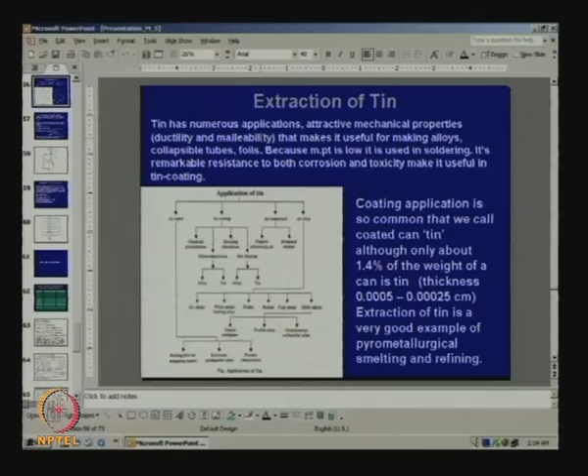Why is tin an attractive metal? If I say it is attractive because of various applications, that is not the right thing to say. Actually, the various applications come because it has many attractive mechanical and chemical properties. Because we have these attractive properties, we have found applications.

The attractive properties comprise mechanical properties. It is malleable, it is ductile, which means a piece of tin can be made into a thin strip, it can be formed into many shapes. It is also very useful in making different kinds of alloys which find wide applications, and you find tin or tin alloys in many household consumer items like collapsible tubes, foils, etc.

One big advantage of tin is its melting point is very low, only 232 degrees, and if it is low, it can find applications where we need some low melting alloys, like in solders for joining wires. So it is used in solders.

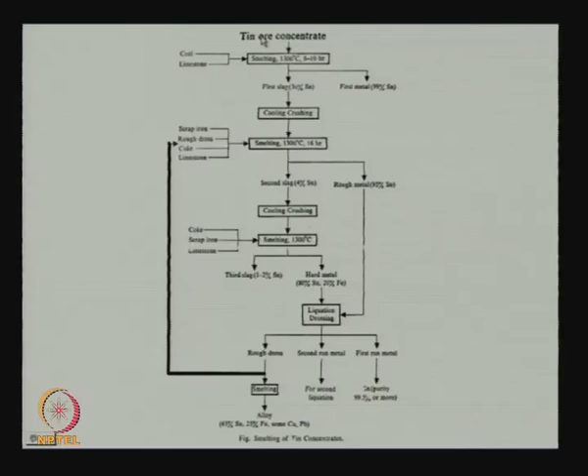Please note that SnO2 cassiterite is a fairly heavy oxide. Silica, gangue, etc. have a density of about 2, while SnO2 has a density more than 7. So we can employ gravity separation techniques, which exploit differences in density, particle size and shape. It is possible to produce a fairly rich tin ore concentrate with very high percentages of SnO2, not pure SnO2, there will be other gangue materials also.

Then we smelt, say at 1300 degrees for 8 to 10 hours. We add coal and limestone to make a slag, because the limestone combines with gangue which contains SiO2, producing a fluid slag. In that fluid slag, 30% SnO2 will dissolve. If you want, we can reduce it. If you make conditions more reducing, add more carbon, allow more time, tin will come out, but iron will also come out. We do not want that. Initially, we allow an incomplete smelting precisely because we want the first metal to be as pure as possible, and we might get as much as 99% tin in that step with only 1% impurities.

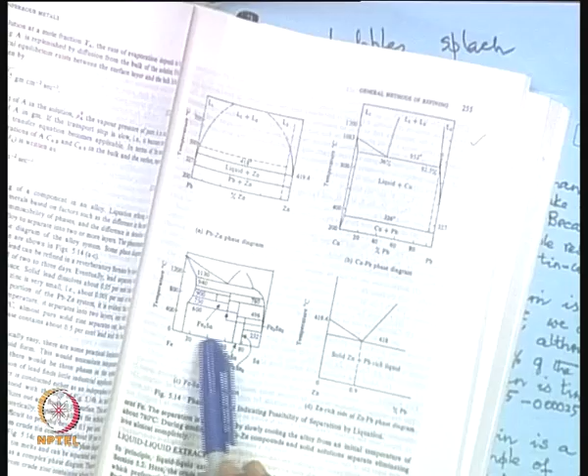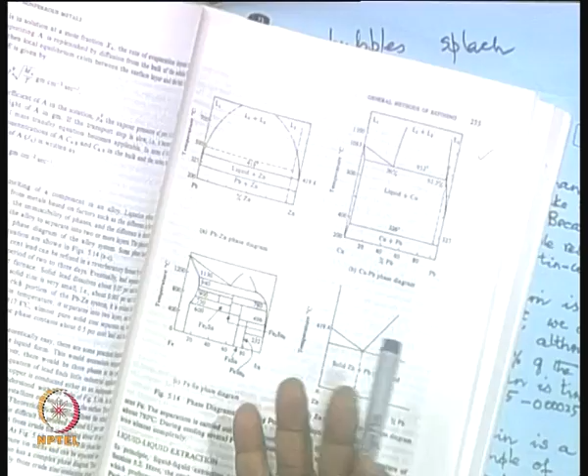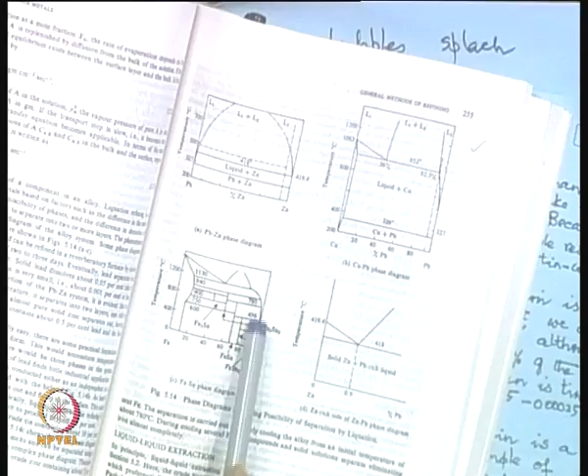The process of liquation makes use of the phase diagram. I hope you can see this phase diagram here. If not, it is in my book on extraction of non-ferrous metals, in the chapter on tin. This is the phase diagram for tin, with iron on this side and pure tin on this side. You see how complicated this phase diagram is, all kinds of phases forming. There is also around 75% tin, FeSn, an intermetallic compound, and also FeSn2, another intermetallic compound.

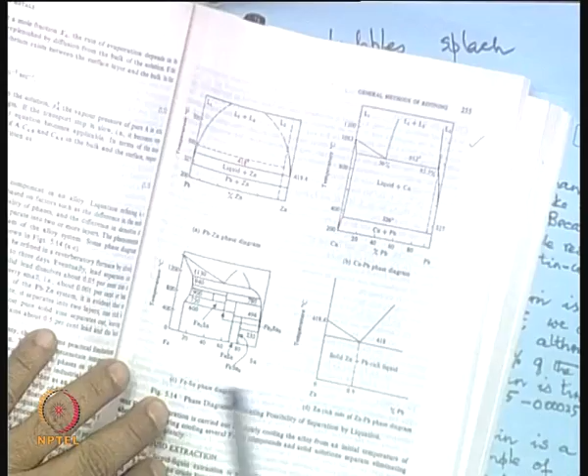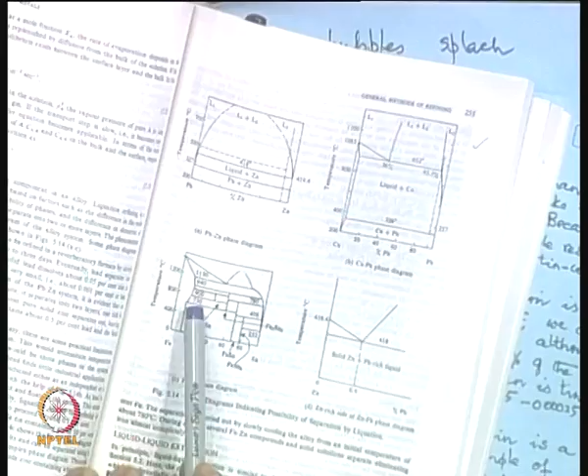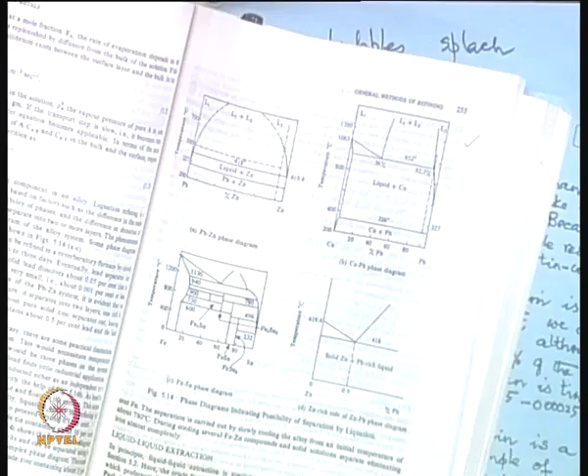The point to note is that if we have an alloy of iron and tin, and hold it around 600 degrees or so, it will separate into two phases. One phase will be almost pure tin, the other iron with some amount of tin. This is what is done by liquation: you simply take that alloy containing iron and tin to a temperature of about 600 degrees, and it will form two layers. Tin will float up because it is lighter than the iron-tin alloy. That iron-tin alloy has only a small amount of tin, but what floats up is almost pure tin, which can be taken out. So these are the principles of liquation, and that is what is done in liquation drossing: constantly you get something floating up and you remove it.

Now, this will give us rough dross, second run metal, first run metal - various stages. This will go for another liquation. The rough dross that has tin, iron, etc., will go back recirculated for total tin recovery.

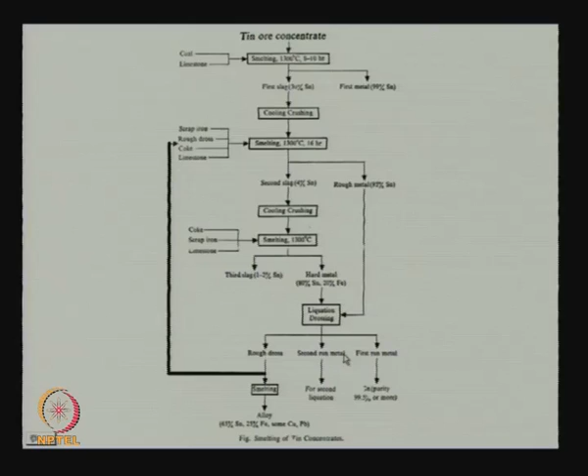The first run metal, the first layer that comes out, will be very pure tin, 99.5% tin. But as you take out pure tin, you are changing the composition of what you are purifying. In the second step, it will not be so pure. In the third step, it will not be very pure - it will only have 65% tin, with 25% iron, copper, and lead. This will have to be recirculated back.

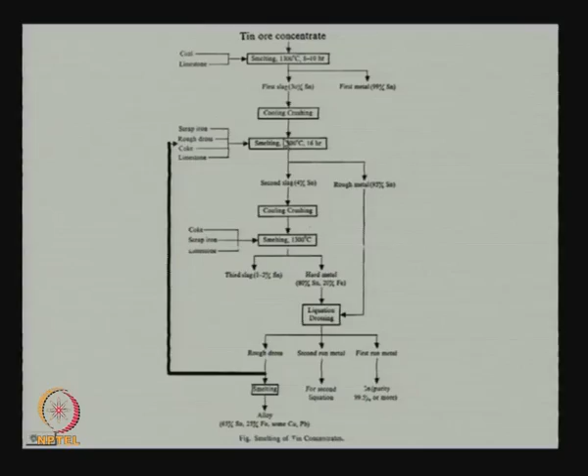So, this is a classic metallurgy of tin, where things are very, very interconnected. But now, equally interesting is how you purify that impure tin that you have produced. I will spend a little bit of time on that.

Now, you should understand: if impure tin is cooled to just above the melting point, then many intermediate intermetallic compounds that exist as impurities will separate out and float as solid crystals. Tin melts only at 232 degrees, so we take the impure tin to slightly above the melting point.

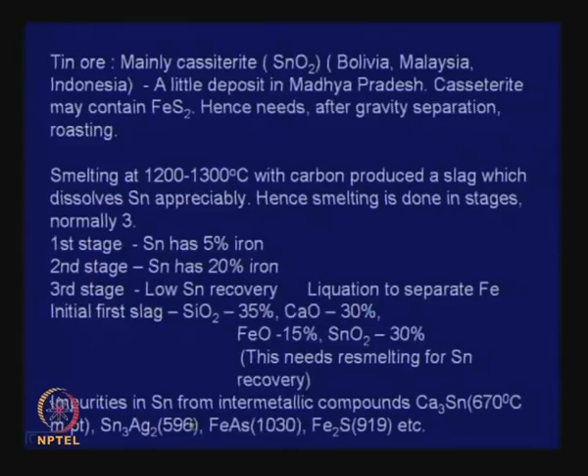You now have a molten mass. Inside, the impurities we have as intermetallic compounds have higher melting points - remember, I have shown them. At the bottom of this slide you have Ca3Sn at 670 degrees, an intermetallic compound with silver at 596, FeAs at 1030, Fe2Sn at 919. So these impurities are very high melting.

So, when there is a bulk of molten impure tin, the impurities inside are not melting, so they will float up. There are some age-old techniques to help these crystals float up. It is done by adding charcoal, because charcoal is a very light material - the particles will float, and in that process they carry those impurity intermetallic compounds to the surface.

These techniques have been evolved thousands of years ago, more than 2000 years ago. Somebody figured out how to do this. So, you go just above the melting point, intermetallic compounds separate out and float as crystals.

Now, pulverized coal facilitates liquefaction. Light rising coal particles carry the crystals with them. Coal also ensures maintaining a reducing condition, so that the impure metal you are trying to purify will not get oxidized.

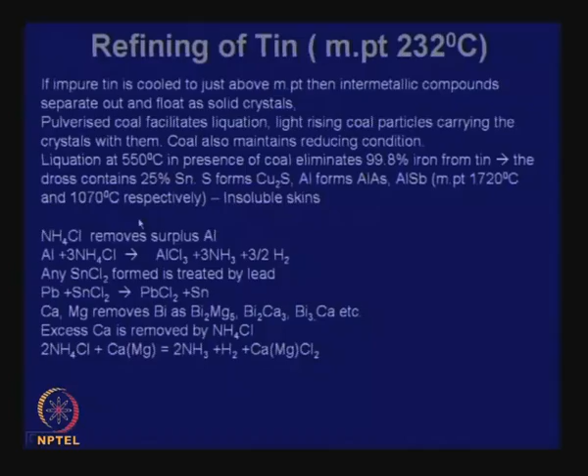I will give you a flow sheet, but you must understand how the flow sheet has evolved. One will add calcium and magnesium to impure tin to remove bismuth as bismuth-magnesium and bismuth-calcium compounds. Since you are adding excess calcium, that excess will be removed again by adding ammonium chloride. So, the impure tin has to undergo all these steps so that we can finally produce pure tin. There is a flow sheet that should make this bit clearer.

This is the flow sheet. We want to purify impure tin.

How would you remove iron? Remove by liquation around 550 degrees. Pulverized coal will be added. Then a skin will form, and skimmings will be separated out.

We will add sulfur to remove copper and remaining iron, which come out as solids and are removed. We add aluminum, and the skimmings should have arsenic and antimony. Ammonium chloride is used for removal of excess aluminum skimmings. All these skimmings go again for tin recovery, because they all have some entrapped tin.

We have steps for recovery of removed lead. The skimming will have lead-tin alloy, which also goes for recovery steps. Then we can add Sn-Ca alloy with Mg to remove bismuth skimmings, which go for bismuth recovery, and again ammonium chloride goes for tin recovery, etc. Finally, we get fire-refined tin.

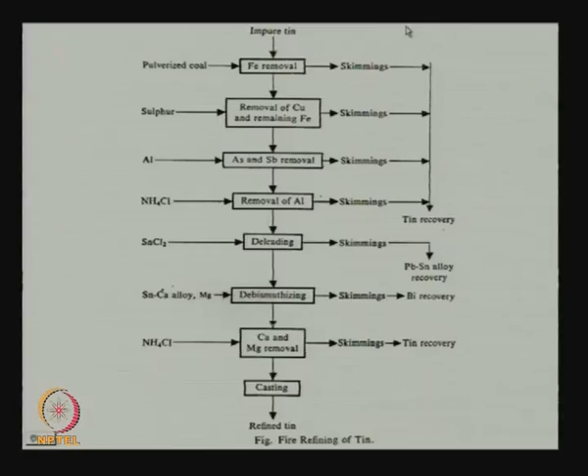Now, these are chemical reactions that have been perfected over a long time, and that is how tin is produced.

The interesting thing to remember is that although it looks very easy that SnO2 could simply be reduced by carbon, that would have been possible if you could produce absolutely pure SnO2. It is not that you cannot do that, but it is not worth all the trouble.

The best approach is to have the concentrate and do exactly as has been indicated, so that initially you let go some tin in the slag and produce fairly pure tin. Second step, third step, then all kinds of steps that have been indicated. So this is how we produce tin.

Let me now go to one or two other elements, and this will be in connection with production of ferroalloys. I have told you quite some time ago that ferroalloys are alloys that contain iron and some ferroalloying element.

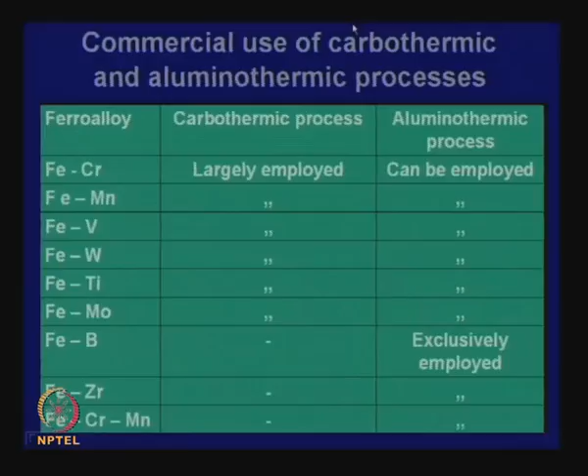It can be universally applied. There is one example, ferroboron, which is exclusively produced by aluminothermic reduction, whereas in other cases there are many places where it is either carbon reduction followed by subsequent refining, or aluminothermic or calciothermic reduction. Both processes are employed.

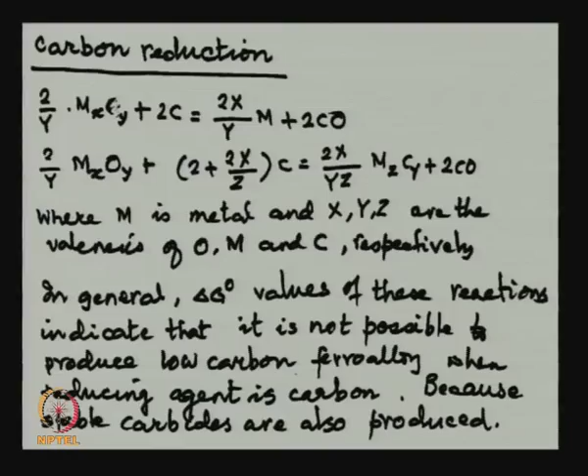Again, to repeat, why do we produce ferroalloys? The reason is ferroalloys are easier to produce than ferroalloying elements, and are usually used for alloying iron, where a ferroalloy dissolves more easily. Sometimes we need them in elemental form.

Suppose we want to talk about production of a ferroalloying element in elemental form. We can take as an example chromium.

There will be a method for producing chromium metal. The source is chromite, which is FeOCr2O3, or you can write it as FeCr2O4, with varying amounts of Fe2O3 and Al2O3 replacing Cr2O3. The grades can vary.

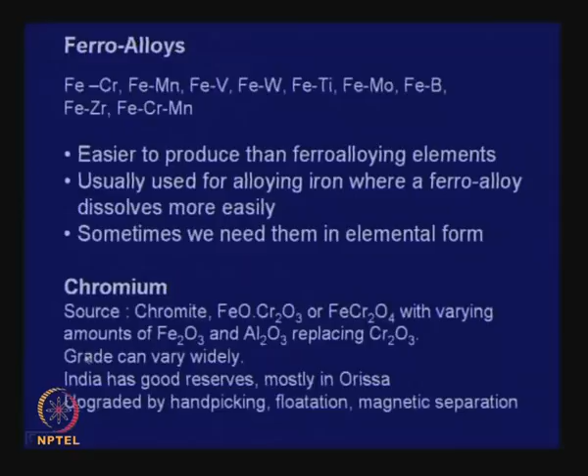India has very good reserves of chromite, almost 80% of that is in Orissa. Chromites are very easily upgraded, because one can selectively pick up pieces and tell which are rich in chromite. They can be upgraded by flotation, where the gangue is floated up, and they can also be upgraded by magnetic separation.

Now we will come to ferrochrome production later on. Let us see how it goes for elemental production of the element. To produce pure chromium, a standard technique is to go through a rotary kiln.

This involves reaction of sodium carbonate with Cr2O3 to form leachable sodium chromate, sodium dichromate. This reaction takes place in a rotary kiln at 800 to 1000 degrees. Then once that is leached, you have Na2CrO4 in solution.

By sulfuric acid treatment, we can precipitate Na2Cr2O7. This is how we do that: 2Na2CrO4 plus H2SO4 will precipitate Na2Cr2O7. This will be in solution.

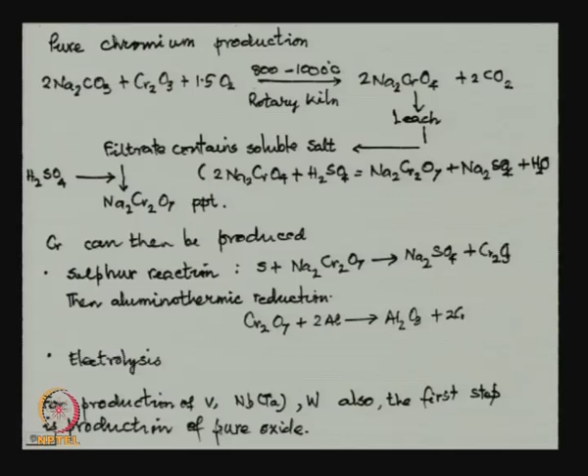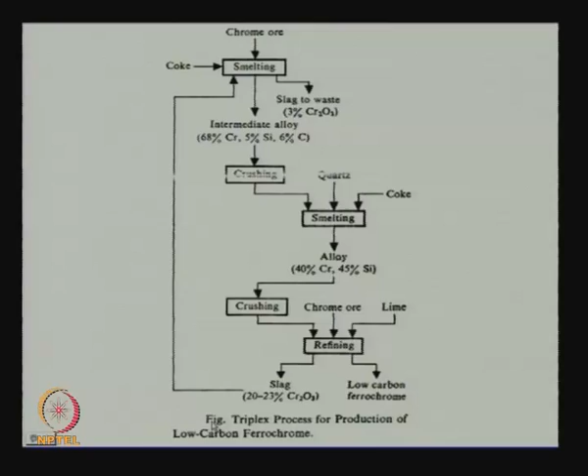But let us go back to discussing ferroalloys as we started. I think there is some confusion here. Excuse me. Okay, let's come here.

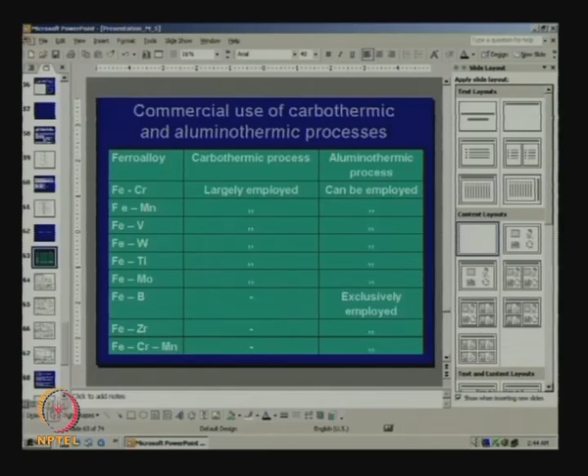So, we were here, and I have mentioned that the aluminothermic process seems to be applicable universally, whereas the carbothermic process would be largely employed for some, but not exclusively employed. Now, let us do a bit of thermodynamic analysis.

Suppose we have a metal oxide MxOY, and we want to reduce it by carbon. Depending on the temperature, either you produce CO or CO2. Let us assume we are going to fairly high temperatures, because these ferroalloying elements form stable oxides, so we will produce CO, carbon giving you CO. It can also produce metal carbide: MxOY reduced by carbon produces metal, or MxOY reduced by carbon can also produce MxCy.

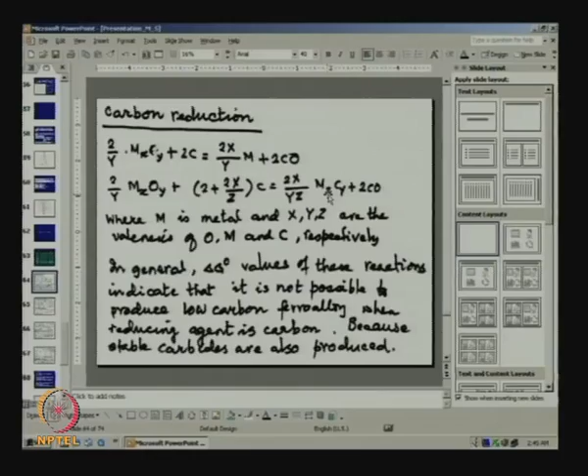So we have to see which reaction is going to predominate. In general, the delta G naught values of these reactions indicate that it is not possible to produce low carbon ferroalloy when the reducing agent is carbon, because stable carbides are also produced. It will not be all carbide, it will not be all metal, it will produce metal with substantial amounts of carbides. So carbon reduction would always do that.

You should know that even in the case of production of pig iron in the blast furnace, what we get is not pure iron, it has carbon in it, up to 4% of carbon in iron, as Fe3C in iron. That is what makes it pig iron, it is not pure iron. So in the case of iron also it forms carbide. So all these metals produce carbide.

But let us look at aluminothermic reduction and do an analysis of this reaction, looking at it from the point of view of heat.

Let us consider reduction of manganese oxide by aluminum. Now, manganese oxide is found in many forms: it can be MnO, Mn3O4, Mn2O3, or MnO2. I would like to ask this question: which of these oxides will be ideally suitable for aluminothermic reduction? This is the question we are asking.

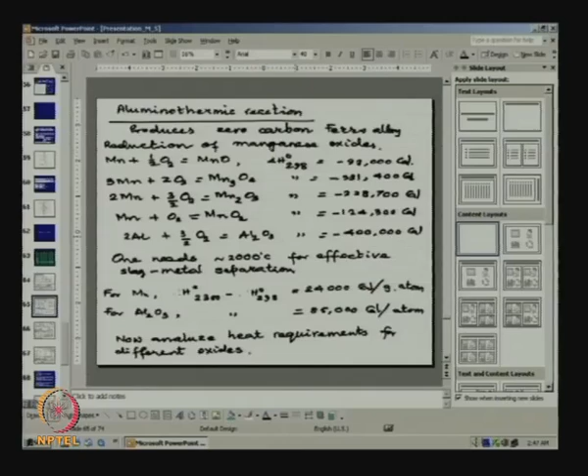You have a problem? Okay.

Now, I have mentioned that aluminothermic reduction is exothermic. So I would like to do a heat balance to find out how much heat is available for aluminothermic reduction for each of these oxides, and then find out which will be just right for production of that metal by aluminothermic reduction.

Consider the formation reaction of MnO, Mn plus half O2. The enthalpy change is this much, and as I have said long ago, this standard enthalpy change does not change very much with temperature, remaining almost the same at all temperatures, minus 92,000 calories. For this reaction it is more, they are both exothermic, but the sign is minus. For Mn2O3 we have another figure, and for MnO2 we have also another figure.

The enthalpy of formation of Al2O3 is written like this: for 1 mole of Al2O3, or 3 by 2 mole of O2, it is minus 400,000 calories.

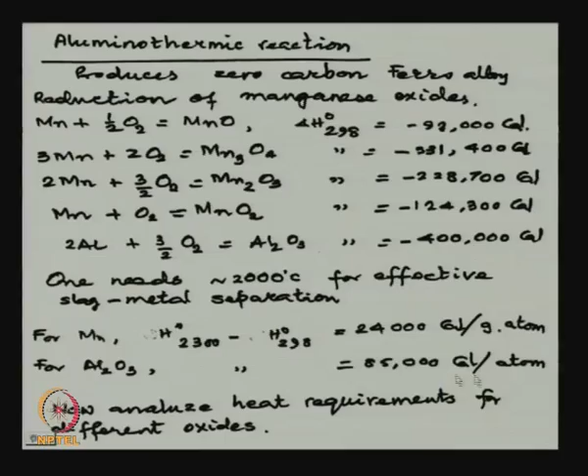Whereas how much heat we actually would need, we will find that out. Now the heat available is this much. Now heat required to increase the temperature of reaction products, namely Al2O3 and Mn, from room temperature to 2300 K, because that is the final temperature we are aiming at for clear slag metal separation, we can find out from here.

This is the amount of heat being made available by the reaction, but for manganese and Al2O3, if you look at the amount of heat that will be required for them to be heated from room temperature to 2000 degrees, it is this much.

So there is a deficiency of heat, meaning we need this much amount of heat to take the products up to 2300 K, but the reaction is giving us only this much heat. So there is a deficiency of heat. So if we want to produce manganese by aluminothermic reduction of MnO, we need to supply heat externally, otherwise the reaction will not be spontaneous.

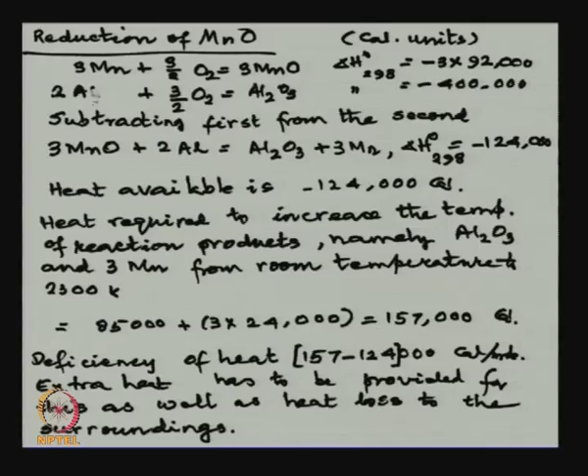We can do similar calculations and do the heat balance for aluminothermic reduction of manganese oxides, and we will find that if we compare heat available and heat required for MnO being reduced by aluminum, heat required would be 157 to take the products to 2000 degrees, but heat available by the reaction is only 124.

For Mn3O4, heat required is less because of the enthalpy considerations, and heat available is more. If we take MnO2, the heat available is much more than what is required to take the products to 2000 degrees or so, and it all depends on the Mn to aluminum ratio in the reduction charge.

So the conclusion of this kind of analysis is that it will be very risky to take MnO2 and try to reduce it by aluminum to produce manganese, because there will be excessive heat and it can be explosive. Of course, when the charge is becoming too hot, it can be controlled also by adding iron chips.

We can put iron chips to dissolve manganese and also absorb that heat by getting heated up from room temperature to that temperature. So we can produce ferromanganese that way and control the reaction. So when reducing MnO2 by aluminum, if we find there is too much excess heat, we add iron chips which will absorb the heat, produce ferromanganese, and not allow explosive reactions.

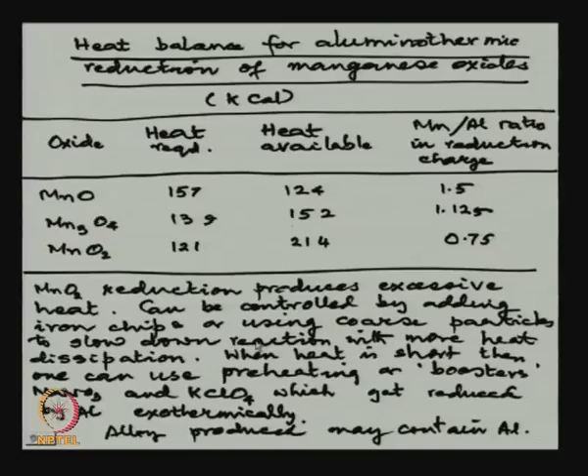Now, in all these cases, when you are using aluminum as a reducing agent, the alloy produced may contain aluminum. So we have to worry about what we do if it contains aluminum. I will not discuss this now. There are ways and means of ensuring that this does not happen, or if it happens, how to get rid of the aluminum. But I will stop here now.